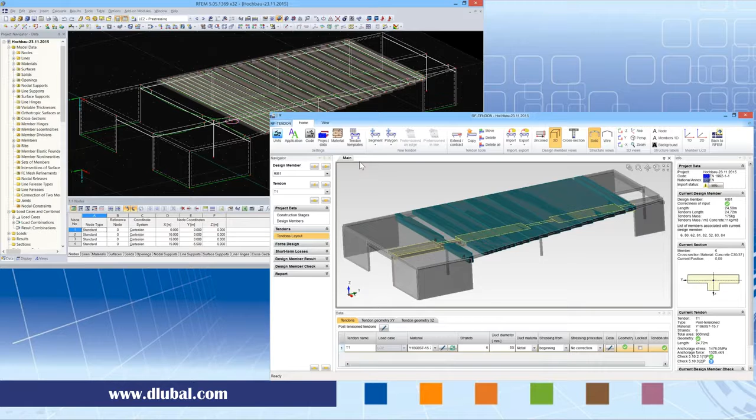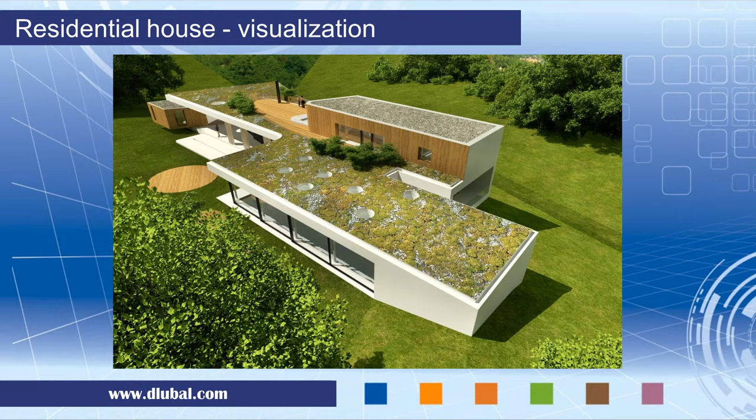And I was involved in the analysis and design of this post-tensioned slab, which was part of the floor of the roof of this house. You can see now the tendons designed in the slab, and we can also see the final structure which was cast.

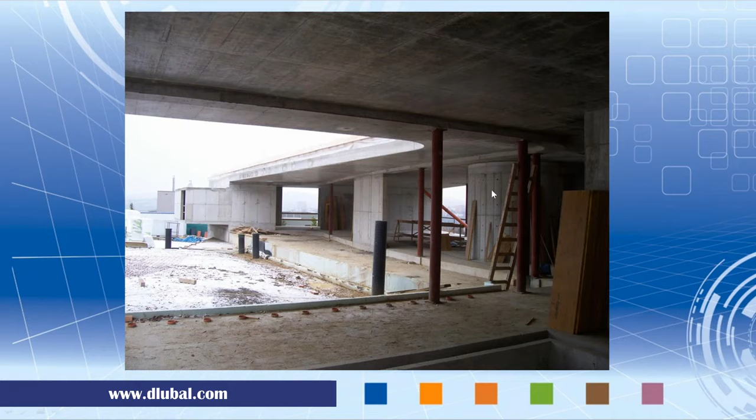It is quite a long span with the cantilever of more than 4.5 meters, and especially because of this cantilever we needed to use the pre-stressing in this family house.

I will start my live presentation in RFEM. We will show what is necessary to start pre-stressing analysis in RFEM. So first of all, you have to define load case type pre-stressing and some load combinations, and also result beams and ribs and slabs.

I will switch into RFEM, and we see that if I go to load cases, I defined the pre-stressing load case here, to which we store not only the equivalent loads but also the results caused by the tendons, caused by the pre-stressing. Other load cases which I did in this example were self-weight, snow, and the roof.

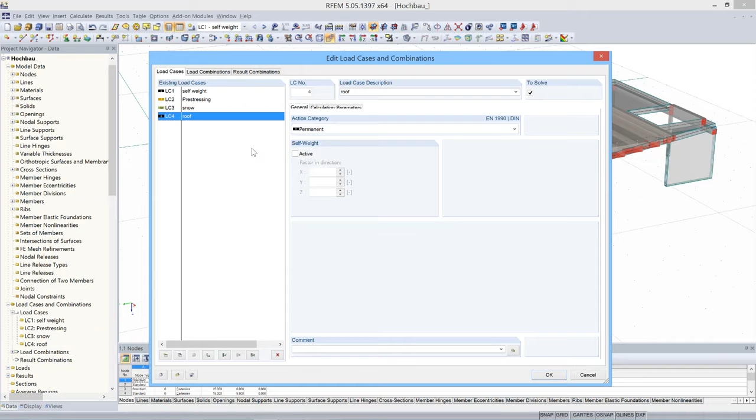In pre-stressed concrete, you should realize that your unit weight of concrete should be a little bit higher than 25 kilonewtons per cubic meter. Either you really calculate it based on the amount of reinforcement, or you simply use 25.5 or up to 26. So that's what I adapted.

Then we can see the combinations, and I defined several combinations. We can of course define more of them to make the analysis more powerful, but this is the necessary amount which I did. All types, ULS and SLS characteristic, frequent and quasi-permanent, are used for the design.

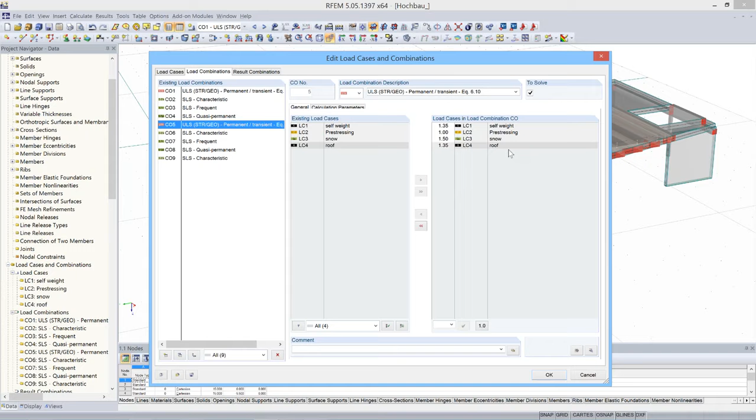And you can see that the first set of combinations contains only self-weight and pre-stressing. That's because we want to analyze the moment when the structure is pre-stressed before any other load is applied. Then I have a different set of combinations with self-weight, pre-stressing, snow load, and the roof. So that was it.

And the last thing which I want to show is this model. You can see that I have defined some result beams, and the result beam, if I select one, is, I would say, a dummy member or fictive member defined in the slab. If I open this dialog, we can define the area from which RFEM integrates internal forces from the slab into this fictive beam.

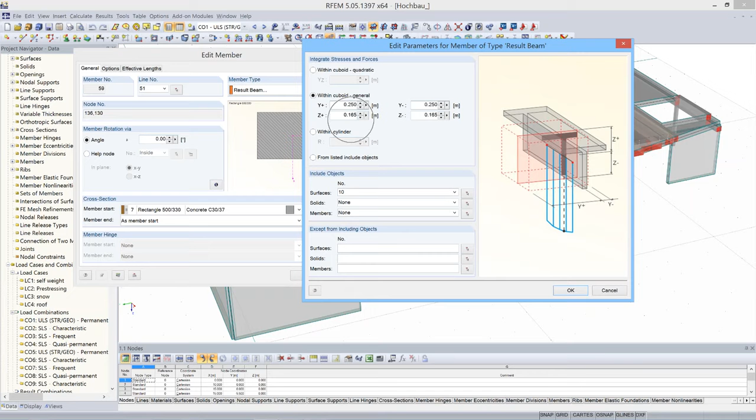So you define the depth of the cross-section plus minus, and also the width. You can also define a different cross-section for the analysis and the design. As you can see here, we have these result beams of the width half meter, and here we have 1 meter. That's because the cantilever here is much longer, and that's why we needed more tendons.

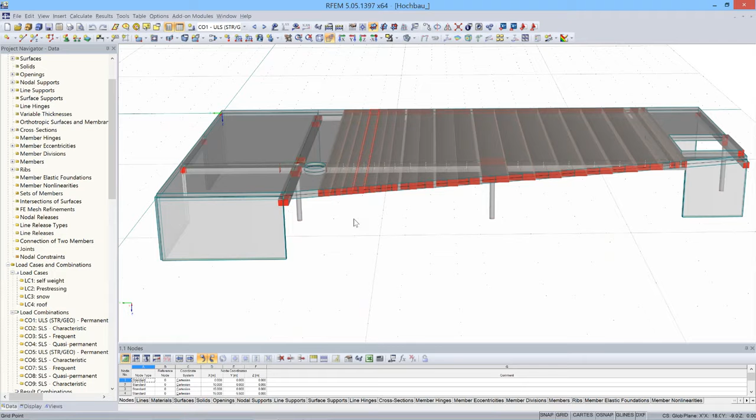If I switch into wireframe model, you can see these green lines, which are the tendons, and you can also see that the tendons are here distributed per half meter, and here the distance of the tendons is higher.

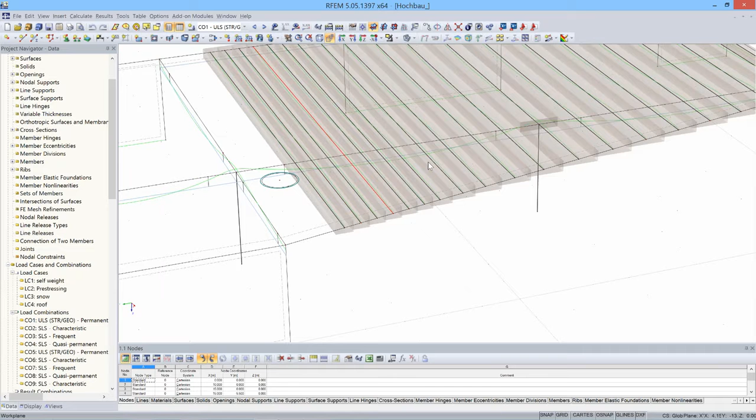The last one which I want to show is this beam and slab system. You can see here that I have a rib which is linked to the slab, and RFEM can integrate internal forces from a defined width of the slab together with the rib, and we get a T-section, which I will show, which then is used in the analysis and in the design.

So next, what I want to show is RF-TENDON and its functionality, like tendon geometry, pre-stressing losses, and effects of pre-stressing. All the data from the model is uploaded to the external module, and we will see this shortly.

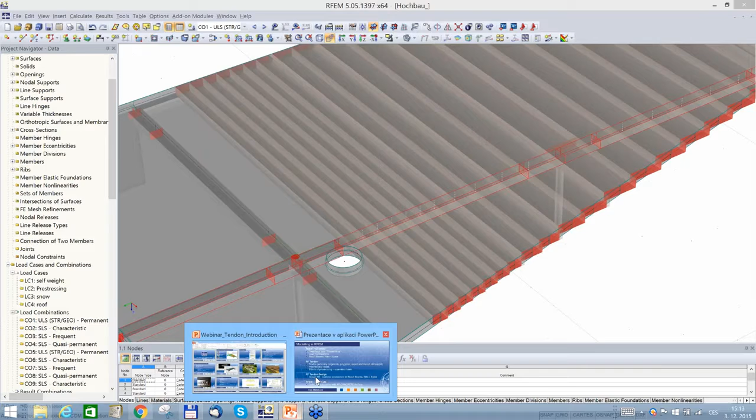After RF-TENDON, I will show RF-TENDON Design, and we also have the possibility to use all other functionality of RFEM, like the nonlinear analysis of the slabs and so on. We have it already here.

So this external module starts with the screen in which you can see schematically how we apply load cases in individual construction stages. The first construction stage is the self-weight. You might remember that it was LC1 and LC2, and also the pre-stressing. And then at 120 days, we apply the additional dead load, like the weight of the roof.

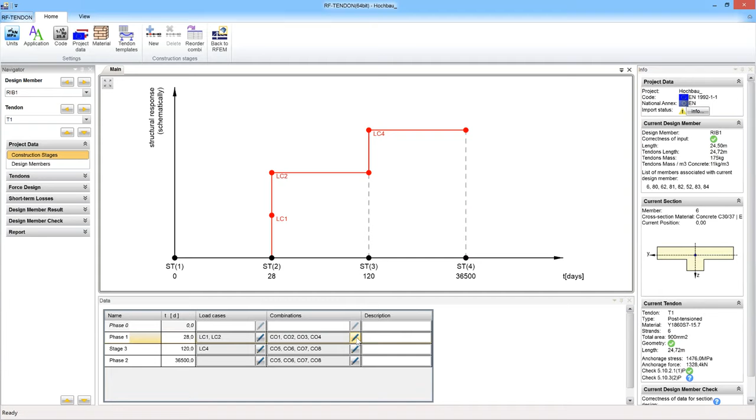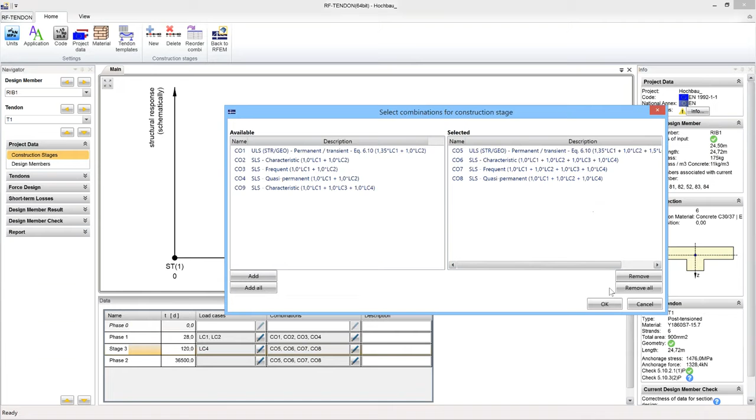And in the definition here, you can, of course, add any combination which contains those two load cases plus possibly some live loads. The other combinations are combinations 5, 6, 7, 8, which also contained the dead load caused by the roof.

Then we can define the design members, and I already defined the member. I can show this 3D view, and you can see that I defined this beam and slab system with no slab above the supports and with effective slab width at midspan.

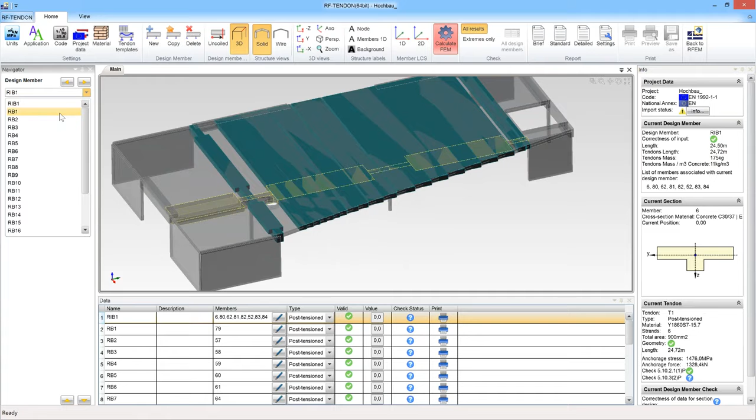We can also go to any other result beam, for example this one, which we have defined in RFEM. You can pick up the members. You can see, for example, this rib is composed of many members.

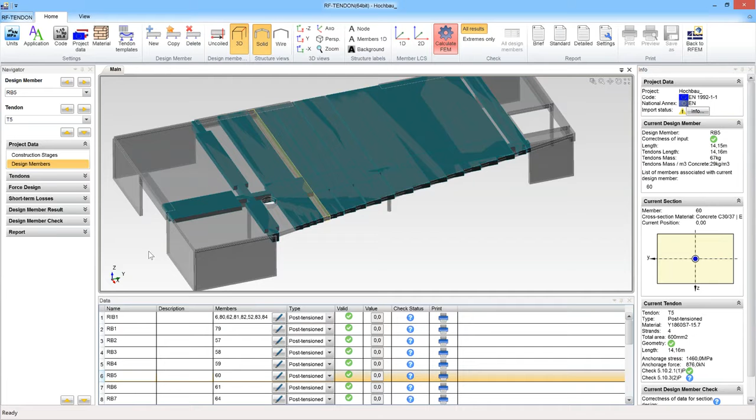So if you edit, you can select the members from RFEM. In case you have a curved beam, we can uncoil it so that you can comfortably work in a 2D environment and analyze a 3D tendon. In case of pre-tensioned beams, you define here in this dialog the parameters of the stressing bed.

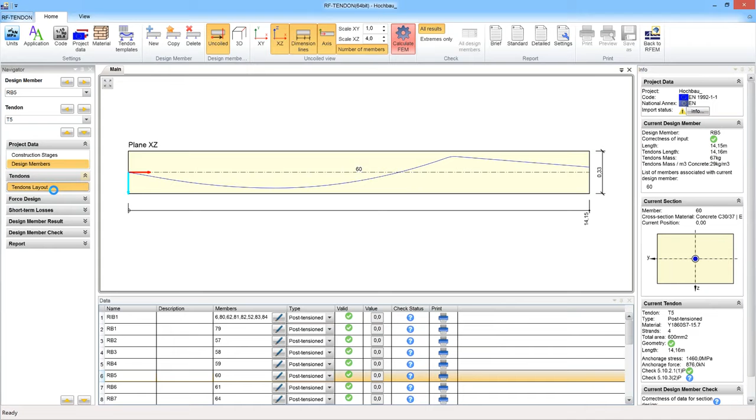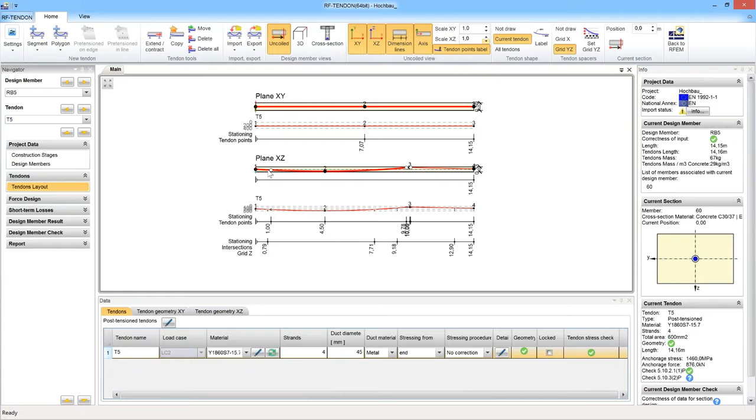Then we go to tendon layout, and we can see now the XY and XZ projections. And if I want to make the beam in the real scale, then it looks like this. This is the plan, and this is the longitudinal section.

If I switch off the plan because I am not interested in that, that will be the straight tendon, and then I can scale it in the vertical direction so that I can work with the geometry of the tendon comfortably and with no problem.

At the beginning, I define the material, number of strands, and also other properties like from which side we stress the tendon, material of the duct, and other things. But I can also, maybe I do not switch it off, I go to this one,

I select one point of the tendon, then I can switch into geometry XZ, and if I switch the drawing here, then I can get a nice explanation of the parameters, how this point of the tendon is defined. The distance is 40 millimeters based on the concrete cover.

From the formwork. This type of tendon which I use, this type of geometry, is composed of two segments. Both are closing segments because there are only two. The first is parabolic and straight on the left hand side, and the last one is this one, straight on the right hand side.

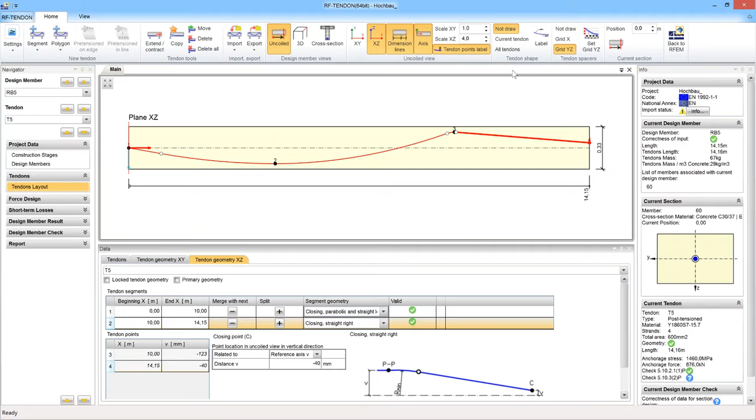The last thing which I wanted to show here is this drawing of the tendon along the length. Maybe I can switch on the labels, and then you can see that by defining these levels from the bottom of the beam, especially from the formwork, I can define the distance at which the spacer with a specific depth should be placed. For example, the spacer which has 300 millimeters will be placed here at 9.18 meters. So the program calculates it for you.

That's it. By composing 2D and 2D geometry together, we get this 3D geometry, and what's more, in case the beam is curved, after we coil it back, we add this coiling to the 3D geometry, and you can have such a tendon. So you work in a 2D environment and you have a 3D tendon. And then we calculate the equivalent load, and we can display the load.

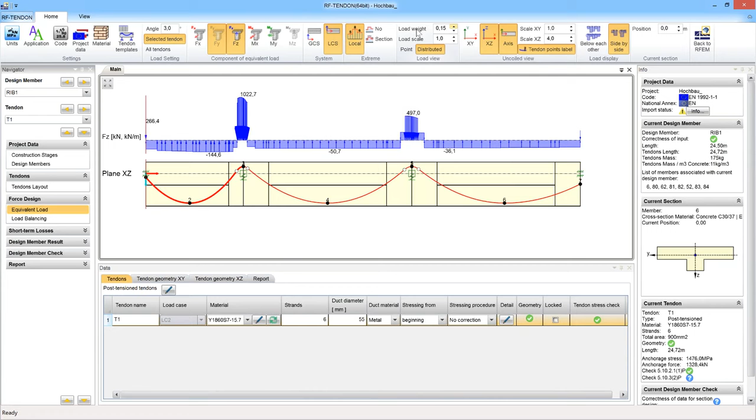Also, if I select the other rib, for example this one, you can see that it is a little bit more complicated. You can play with the load weight. This is not a real scale. This is a real scale, because above the support we have a very small radius. So you see that intensive load above the support in this small parabola. But if we want to see this equivalent load better, then you use this load weight. All these settings on the ribbon are shown in the graphical tooltips.

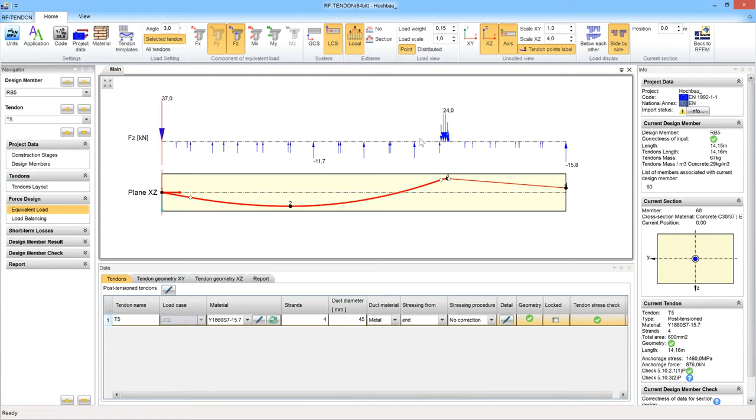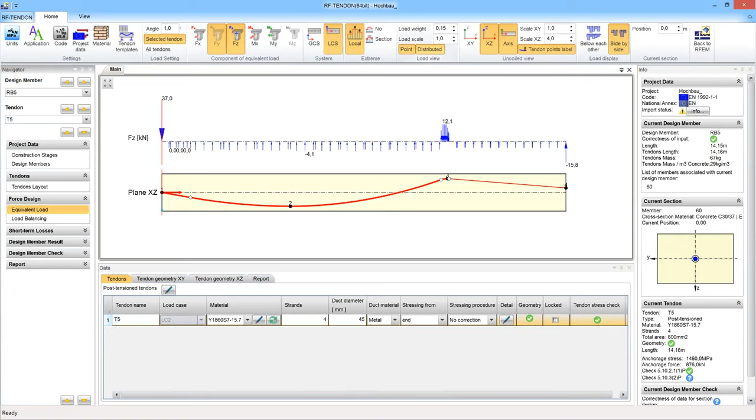If I switch back to this beam to have it a little bit simpler, I can show that you can see not only distributed loads but also point loads, and this is calculated from the deviations of the tendon along its length. After we calculate this, we distribute it into distributed loads. You can also influence the precision by setting, for example, 1 degree here. The smaller the angle is, the more precise the equivalent load you calculate. But if it's too small, it makes the calculation longer, of course. I can keep 1 degree, and we get quite a nice equivalent load.

In some cases, for example in 1D elements, you can also use the functionality of load balancing for the design of tendon force. As we now have the slab, there is no direct load, I mean load per meter. We have load per square meter only.

So the functionality cannot be shown in here, but the principle is that you balance the external load, selected external load, for example self weight, or you can make also the combination of self weight and additional dead load, and you balance it by the equivalent load caused by the pre-stressing. And authors like T.Y. Lin or some Swiss professors advise that you should balance approximately 100%, and if you design to Eurocode, then probably a little bit more percentage of these dead loads.

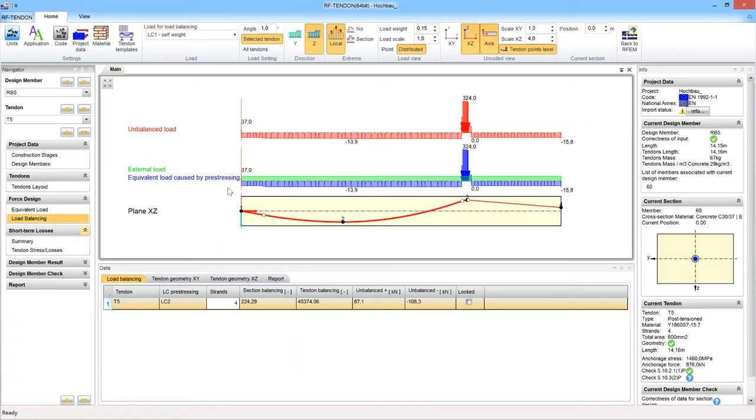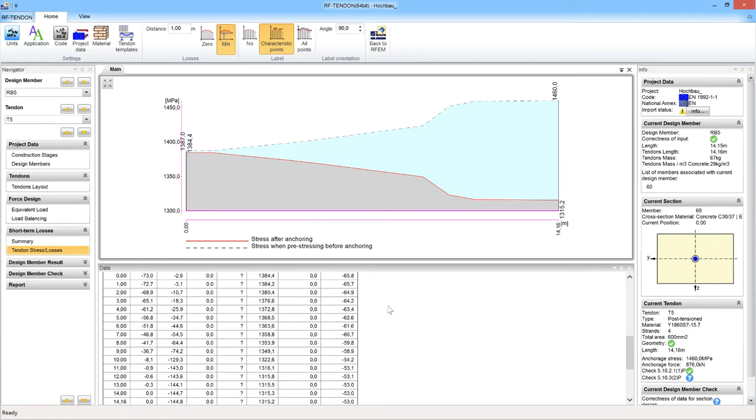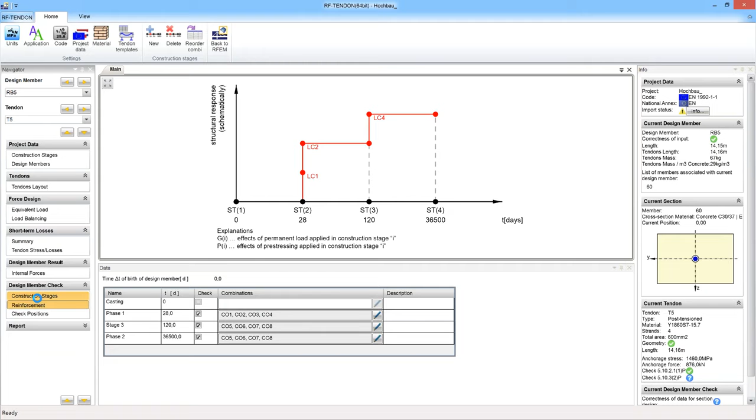Design member results can be shown if we calculate RFEM, but before I do it, I want to explain. This is again the picture of construction stages, which actually can be used if you have different age of the beam in your complex 3D structure. And here we have the reinforcement zones. I have defined the reinforcement, of course. You can see the tendon here.

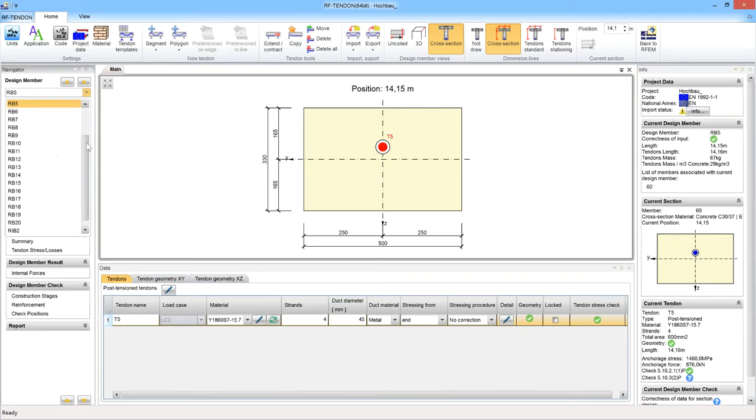Maybe I didn't show here in tendon geometry. Sorry about that. In tendon geometry, I probably should show this cross-section. You can see how the tendon goes in by selecting the position of the tendon. Also, if I select the first rib and slab, and I go like this, you can see the change of the cross-section above the support. So we can check it. You can check it also in 3D.

There are more possibilities which I'm not able to show you here, and possibly we will have more time during our seminars in Munich and Vienna.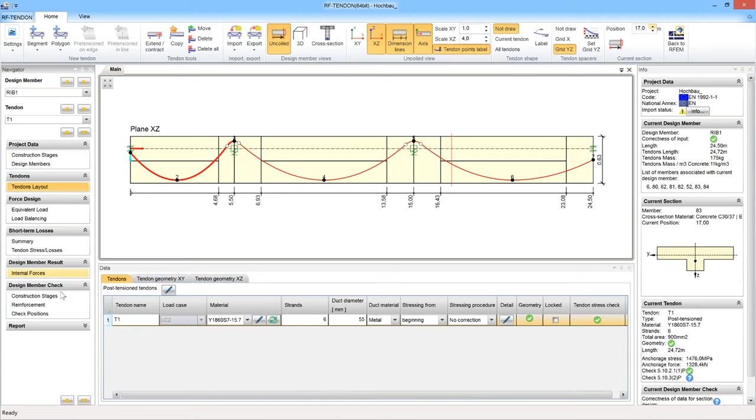Now I go back to the reinforcement. I switch into a more simple rib beam, and we define. Of course, we can add any number of zones. I believe that these can be sufficient for this case, and we can define the check positions, and in these positions we then check the cross sections. So I selected the positions above the supports and at midspan.

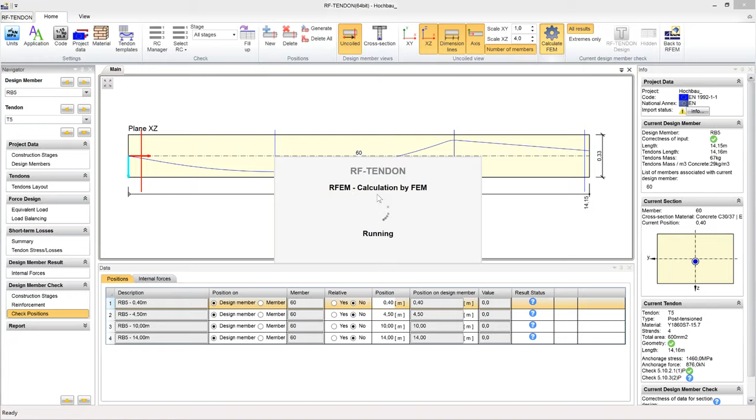Now I press the button calculate FEM. In fact, the external module uses the RFEM finite element engine, and we will get the results of all the load cases and combinations soon. It's not a small structure, but it takes reasonable time, so we will see it in a minute. And in the meantime, I will see if I forgot something.

So we went through the segments of tendon geometry. We explained all the possibilities of polygonal, and now it is finished. I finished this one. Export and import, pre-stressing losses, effect of pre-stressing, and all of these.

Now we go to tendon design. We design the cross sections in these pre-selected sections. We can go to RF-TENDON Design, and all the data is prepared from the construction stages, from pre-stressing, and we find the cross-section in selected sections, and then the data is generated.

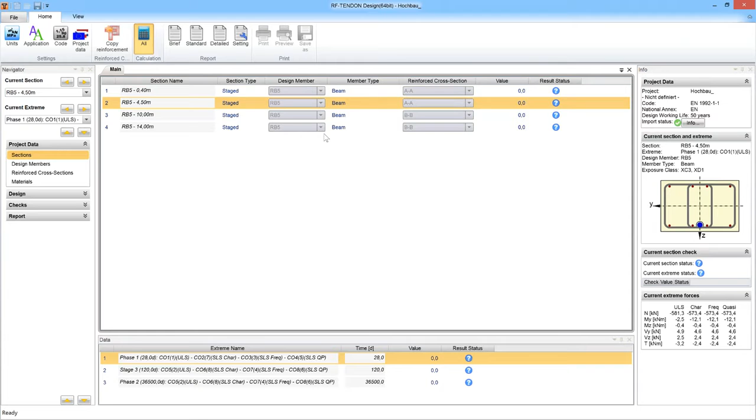Now we have 4 sections. This is above the support. This is at midspan. Again, above the support, you can see it in the info window, and this is, I think, at the end of the parabola. I can calculate all these sections, and as I already designed it, you see that it is satisfactory, 99% above the support. Let's see some results.

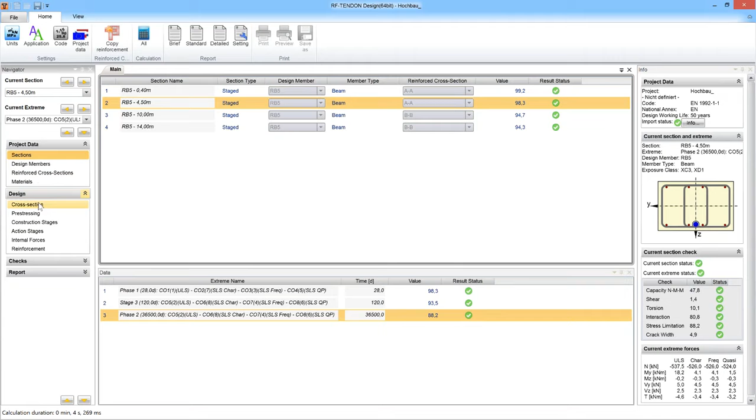Here we have individual construction stages. Stage at pre-stressing, then when additional dead load is applied, and at 100 years. I will skip these data which in fact were filled in. You see, for example, these construction stages were uploaded from the module. You can see how it changes, but we cannot change it as it was imported from RF-TENDON. But it is for your information.

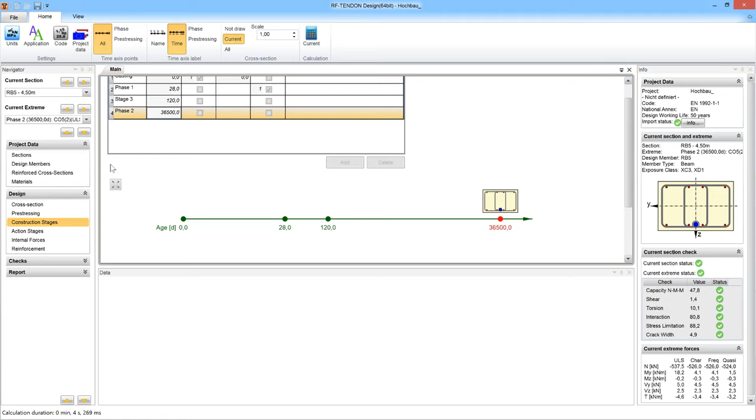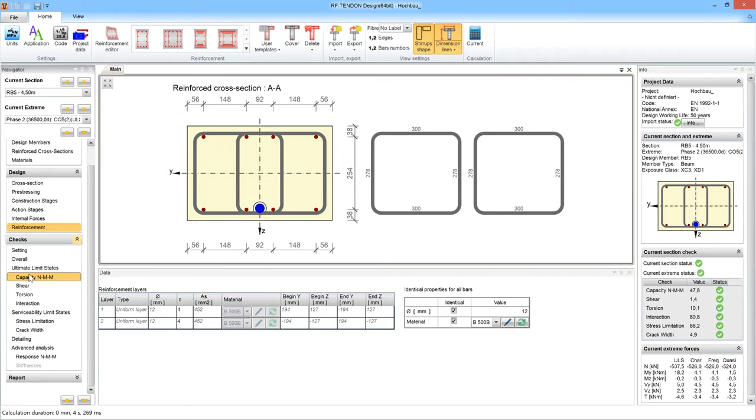Also action stages, internal forces, there are all the losses and forces shown, and here you would define the reinforcement. There are quite nice possibilities of the definition of the reinforcement, and you can see the reinforcement, how it goes. But let me explain these checks, concrete checks. First we have capacity, in which we show the capacity against flexure and normal force in an interaction diagram. Of course, you can see many possibilities on the ribbon.

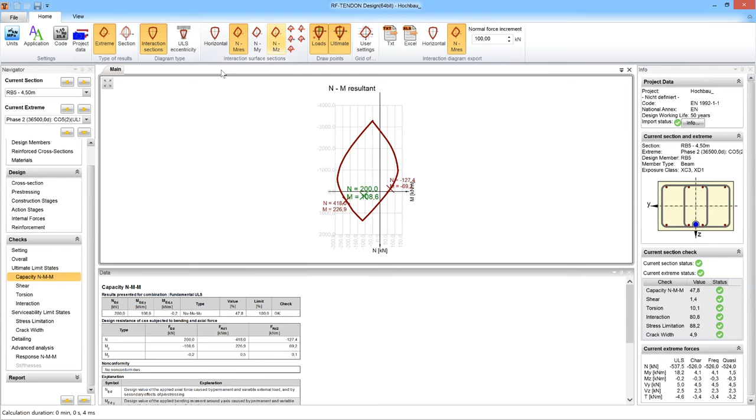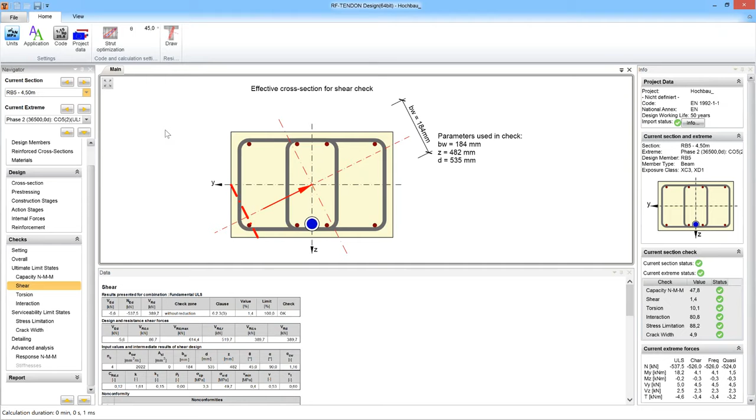Shear analysis. Here it is interesting, and I wanted to show you that if we are at midspan, then the longitudinal shear is even bigger than the vertical one. You can see the direction of the shear force, and also the effective width of the slab. So we need stirrups in both directions. If we select the section above the support, then you see that this direction of the shear force is vertical, and this one at the end is even bigger. This is almost completely horizontal because of the shear lag.

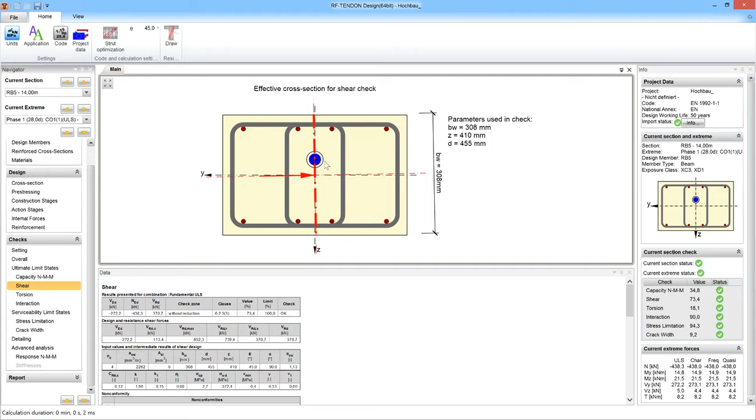If we apply a high normal force of pre-stressing, then of course just behind the anchor we should not use the sectional analysis. It is the anchorage zone, but I don't think I made it immediately after the anchor, and still RFEM integrates quite significant forces, but we can design them with no problem. So let's go back to the midspan. Oh, maybe I should have shown this torsion above the support, but doesn't matter.

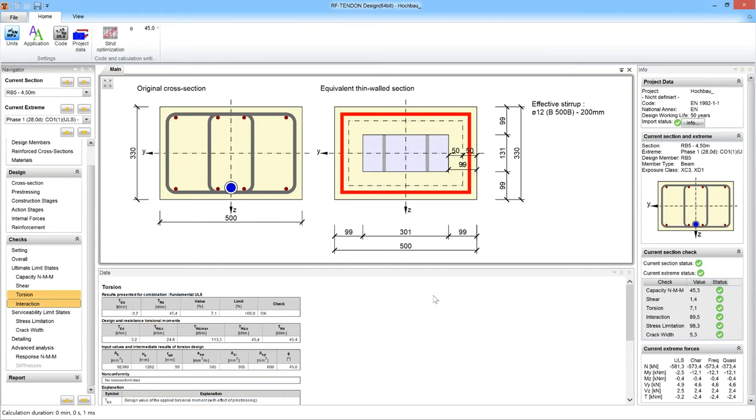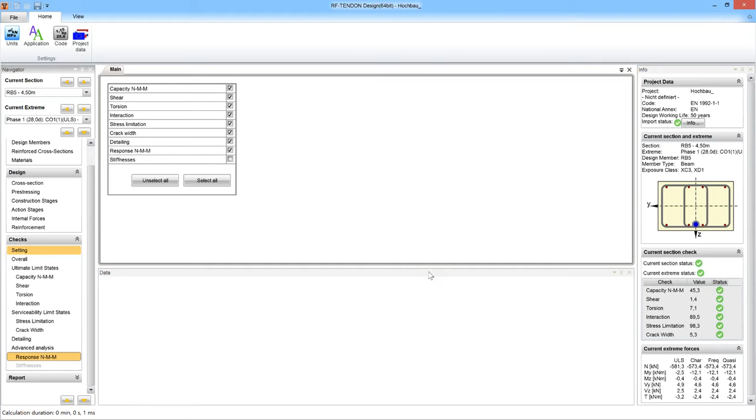We have also the possibility to analyze the interaction of all internal forces, which I will explain later, especially during the webinar. Stress limitation, concrete, pre-stressing reinforcement and non-pre-stressed reinforcement, crack width. Then some advanced, we have the possibility to check the detailing, but I switched it off. Here in settings you can switch it. Oh, this is not switched now, but sometimes you have to switch it off because you do not provide a real reinforcing cage.

And the response or stiffnesses, response I can show here, and you can use this response to show all these stages. So that was at 28 days. You can see that there is quite significant pre-stressing at bottom fibers. Then at 120 days we have some losses already, and also higher load. So this is smaller, and at 100 years it is even bigger difference.

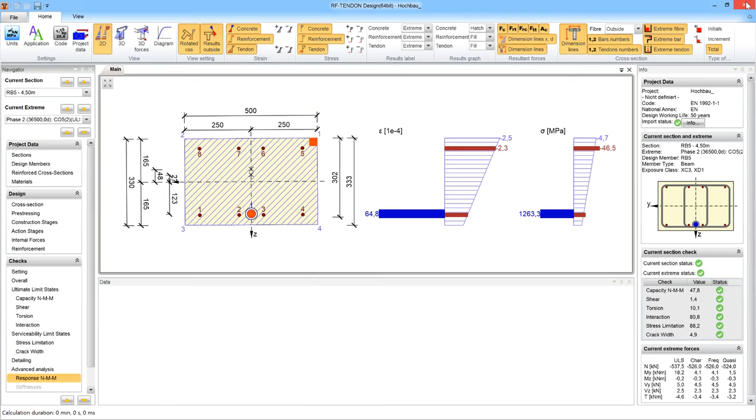When we are happy with the design, then we can go back to RF-TENDON, and we can switch into, for example, this RIB, which was more complicated with a complicated section, and again you define the sections which you really want to be analyzed and to be checked according to code, and the program again generates the data. In this case, I found a small problem. I can calculate all with the stress limitation. You will see in a second. So now we have here a progress bar, and it shows you it's already done, what calculation is being performed, and here we have 102.

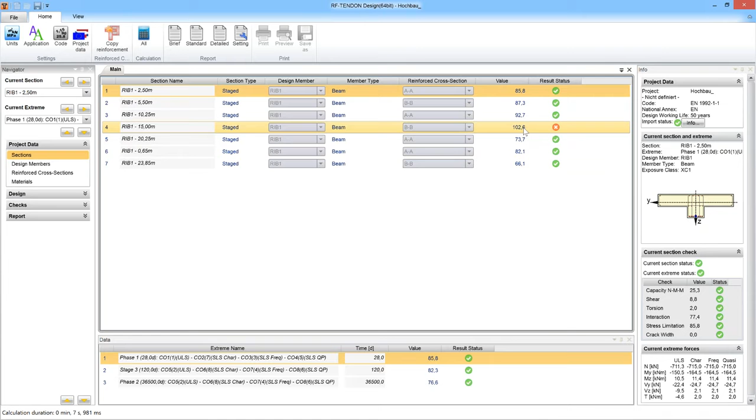So how to check it? This is a section at 15 meters. You see it selected here, and the check which is not satisfactory, only by 2%, 2.6, is stress limitation. Then we go to checks, and you select stress limitation, and we see this is the fiber in which the ratio of stress and stress limit is critical, so is extreme. We can also make this bigger. There is 13.9 megapascals, and it should be 13.5.

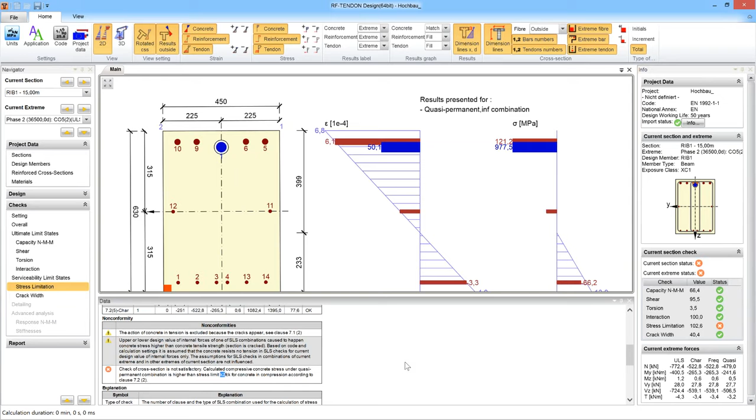The program tells you exactly what is happening in the cross section, and sometimes, if it's straightforward, it gives you some non-conformity. For example, check of cross-section is not satisfactory, calculated compressive stress under quasi-permanent combination is higher than stress limit, and so on. You can either increase this K2 factor in case, for example, that it happens during the pre-stressing in the fibers where you have the pre-stressed tendons. Then due to the fact that you measure all the forces in the tendon, you can afford to decrease r_sup and r_inf factors.

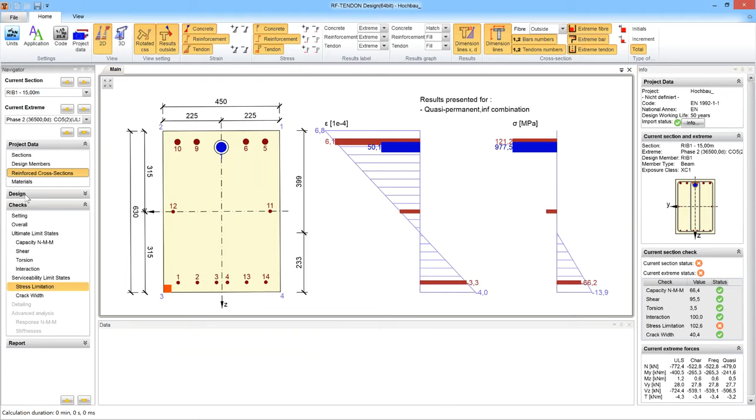But in this case, it is at the end, you can see that it is phase at 100 years. And in this case, either we say, okay, 2% is not that big a problem, or we would have to increase the depth of the cross-section, or we can also increase the concrete grade. The other possibility would be if we go to design and reinforcement, then I can select, zoom all, I can select this layer, and instead of diameter 12, I can try to use diameter 14, and I calculate current extreme, and I see that it is only 0.9%, so we can play with it. Maybe diameter 16 would be okay, and it seems it would.

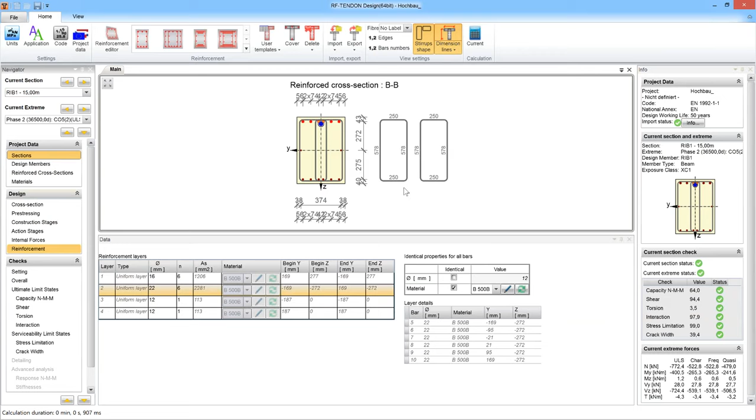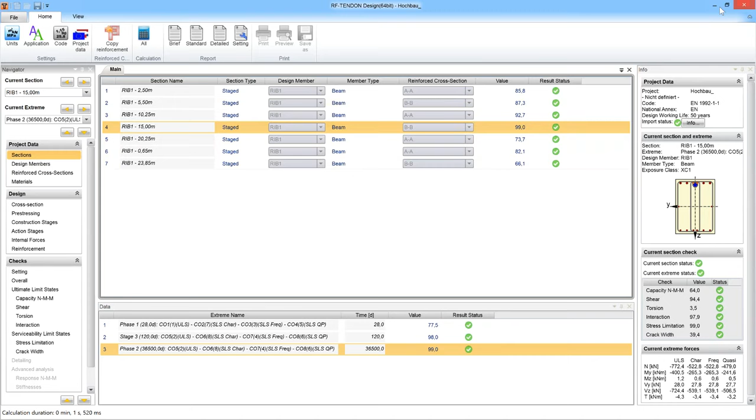So if we go back to sections and we calculate all, because all the data of that reinforced cross-section was deleted, then we see that the RIB in this case is satisfactory. Maybe we can go through all these navigator items, but I would prefer to finish the example, and we can concentrate on that in some other webinar or seminars. Of course, we can generate reports both in RF-TENDON Design and RF-TENDON, but I think as the example it was enough, and we can go further.

So I explained the design, or I would say sectional assessment or sectional check in result beams and ribs, but you might object that this is a 2D member, this is a slab. Then, of course, once you have designed these 1D fictive members, then you get some non-pre-stressed reinforcement as an additional reinforcement, which has to be put into the slab. And you can also use the functionality of this external module, which puts the equivalent loads back into RFEM as upward loads.

And now you have one load case, like for example self-weight, which acts downwards, and of course pre-stressing acts upwards, and you can perform the analysis of the 3D structure with the slabs, and you can also perform 2D design directly in RFEM. And after you have this potential additional reinforcement, additional to the one which we found in result beams, then you can also perform this non-linear analysis of 2D slabs. We definitely will show it during the seminars.

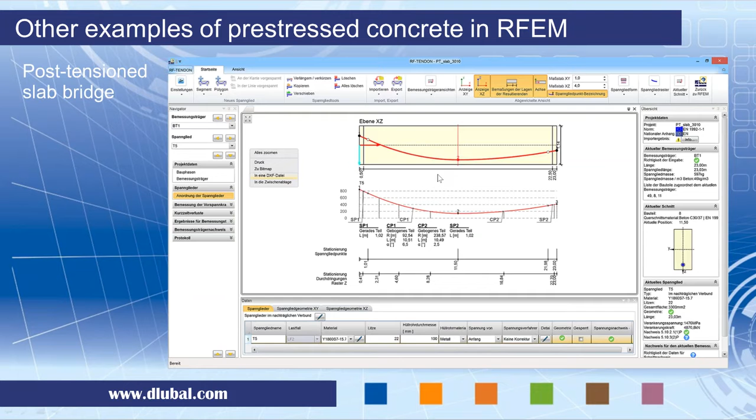I defined it exactly according to that textbook, and then we can get the results in RFEM back. This is the effect of pre-stressing and the upward deflection, and this is the view from the bottom of the bridge.

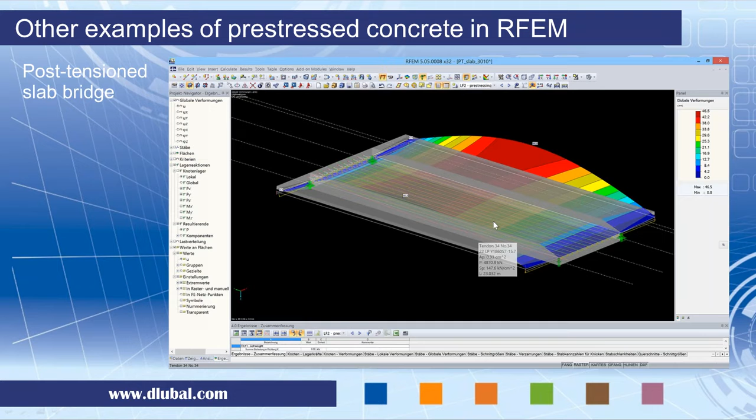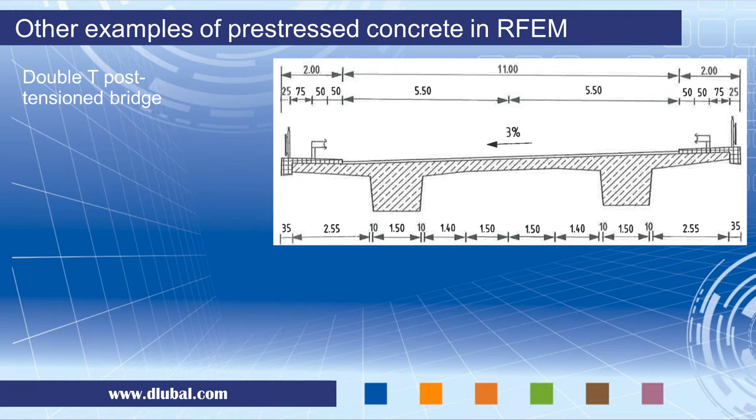Another example which we made, actually Adrian Langhammer input, is a double T post-tensioned bridge. This was from a German report, which I do not remember the name, but Adrian can tell us. This double T post-tensioned bridge was modeled in RFEM as two independent beams which were linked together by an orthotropic slab.

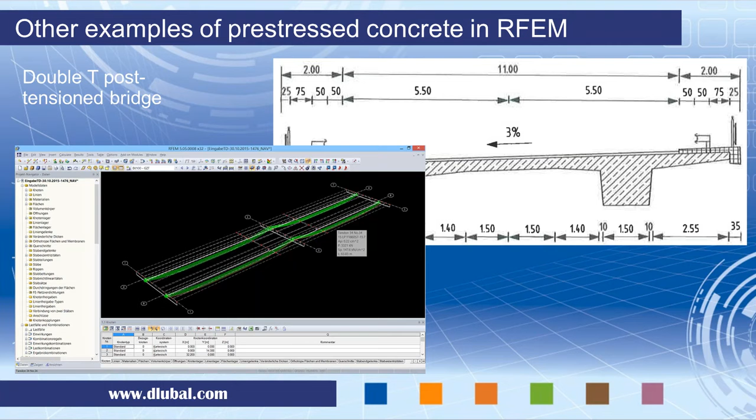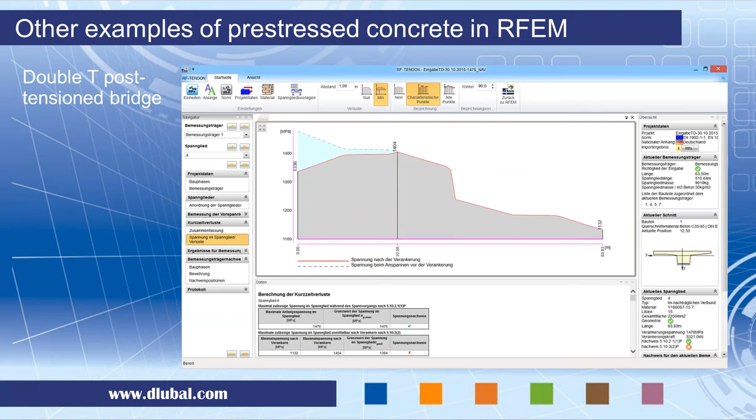The slab had zero stiffness in the longitudinal direction, because in the longitudinal direction we had these beams, but it has some stiffness in the transverse direction to make sure that those beams share the load applied only on one of them. So that was the model. Of course, as you might have seen in the previous picture, we designed the tendons and calculated losses and all other checks.

You can see the checks in RF-TENDON Design. First was a flexure check, and then shear, and also here the torsion check. I haven't mentioned that this equivalent thin-walled section is calculated automatically.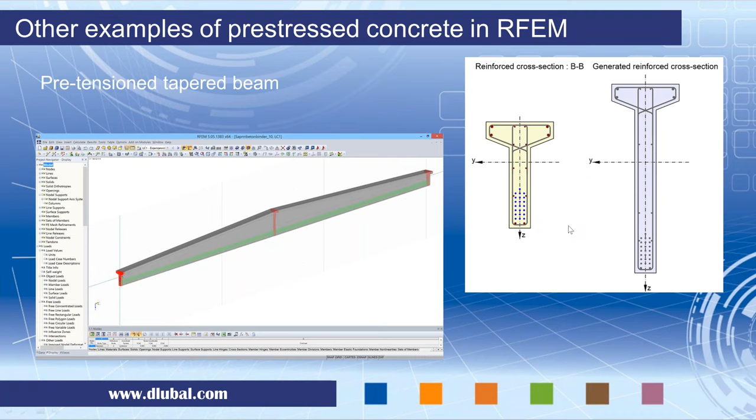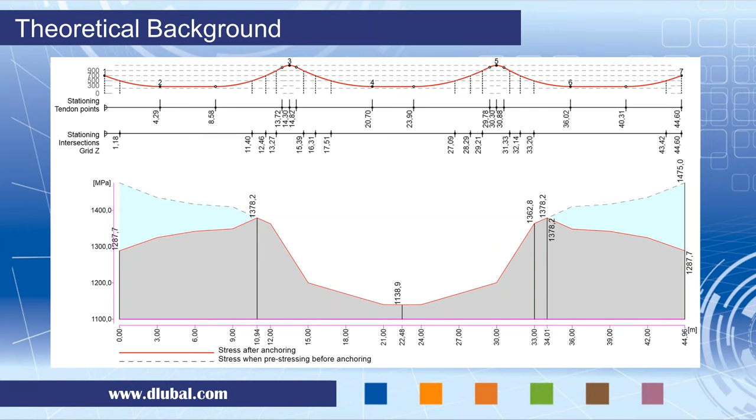After we showed all these examples, I would like again to indicate some topics which I would like to address during the seminars. So it is a kind of theoretical background. Definitely we will be speaking about the losses. This is a picture of the longitudinal profile of the tendon and frictional and anchorage set losses.

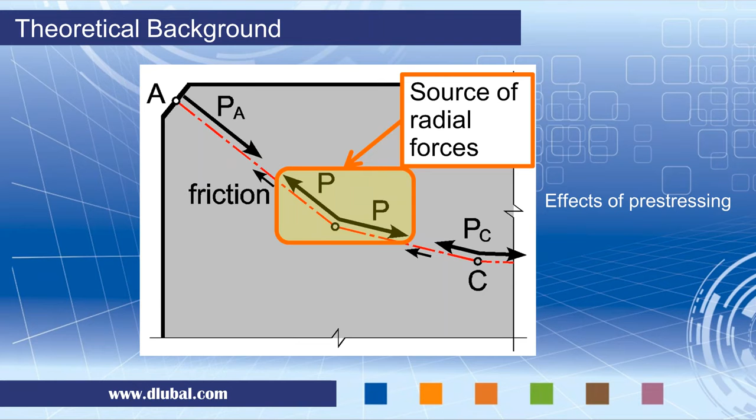Then we should be talking about the background of sectional design. We see ultimate limit states and serviceability limit states, all the list of the checks. Anyway, you saw the possibilities in RF-TENDON Design, and here you can see also the German and Austrian flag. So we have national annexes of DIN and ÖNORM.

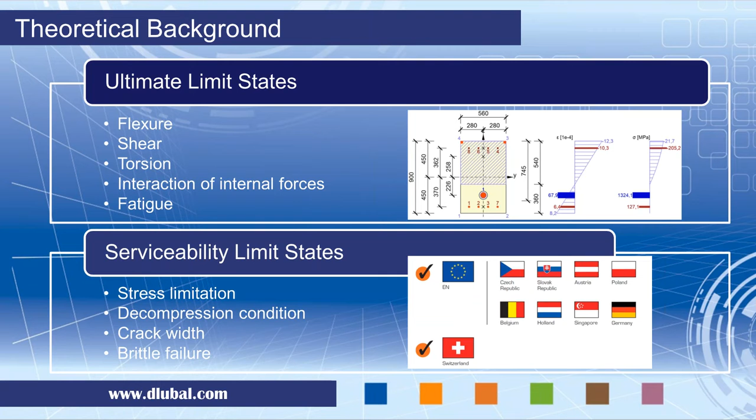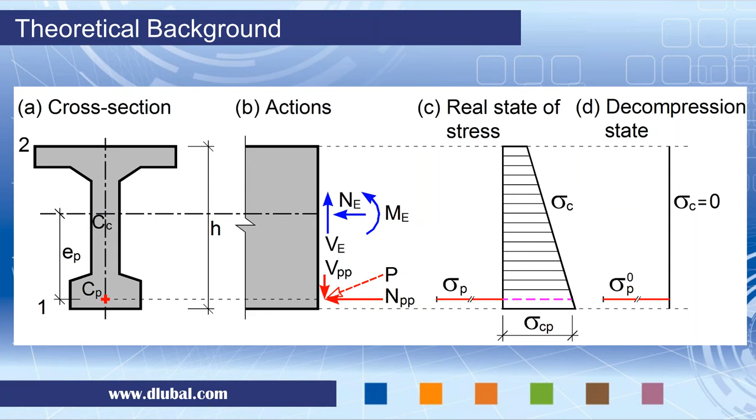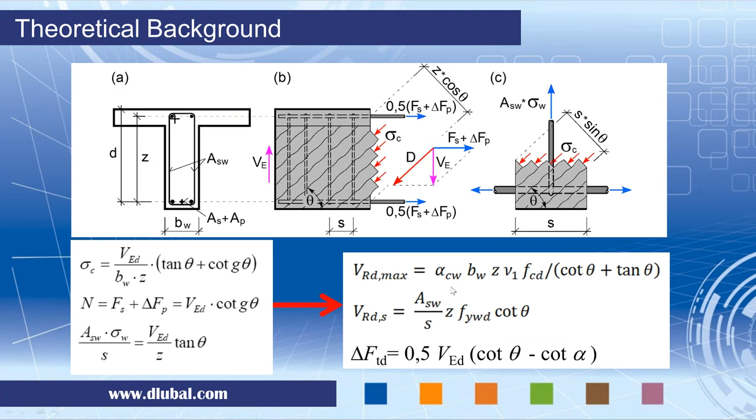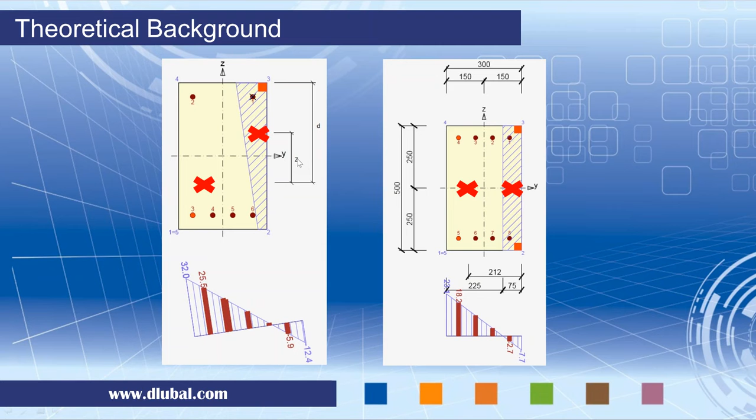For the analysis of the sections loaded by bending moments and normal forces, we will discuss the methods. First, the decompression state method, but also the initial state method, which we introduced in RF-TENDON Design. We will touch also the shear analysis, the equilibrium conditions, and how from these equilibrium conditions the Eurocode formulas are derived. And what is the role of the lever arm caused by the flexure in the shear analysis? That will also be a topic.

And last but not least, we have a nice feature of interaction of all internal forces. You can see all internal forces here, and this is just the explanatory picture of how you can combine shear force and bending moment.

I will select this one. This is a little bit simpler, and I go to tendon layout, and you see you can draw the current tendon, for example. You can set the labels, which show the radius, length of the parabola or part of the tendon, and cumulative angle. And I will switch this to here. So now you can prepare it. You can also change the grid. It is here. You can define either equidistant or non-equidistant levels.

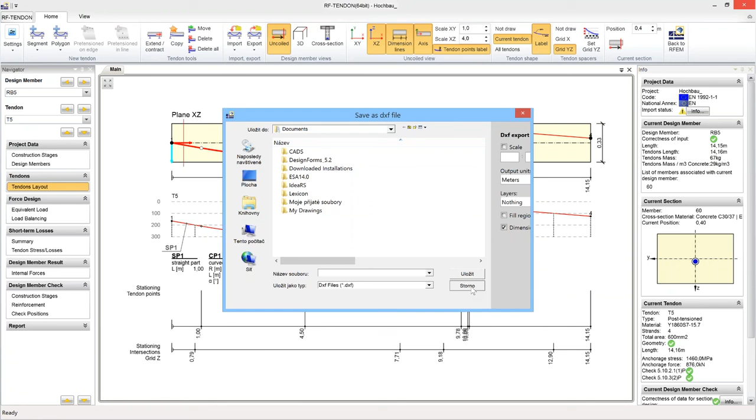I do not want to go further. But after you are happy with the picture which you produced, then by pressing the right mouse button, you can go to DXF file. Okay, you export it as a DXF file. So it is possible, and you have a nice draft drawing already. You can also draw all tendons. If you have more tendons, you can draw one tendon after the other, but in this result beam we have only one tendon, so we cannot show it. Okay? Okay, great. That seems to be quite easy.